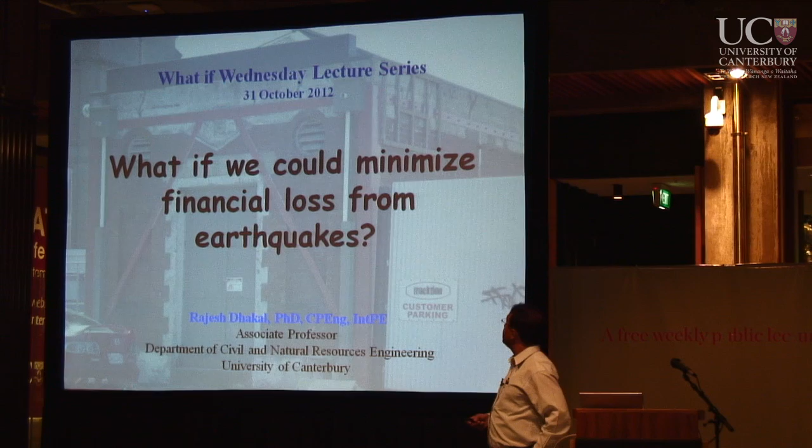So the topic of my talk is: what if we could minimize financial loss from earthquakes? Before I go any further, since I'm going to refer back to the seismic design principles, or earthquake-resistant design principles, it's better to have a quick look at what seismic design actually does. All these seismic design philosophies throughout the world, wherever you go, the guidelines are driven by a few principles, and those principles are given here.

The principle is we require immediate occupancy of our structures, which means no disruption of service after small and frequently occurring earthquakes. If we apply it to buildings, the building does not need to be closed for repair, but it does not require the building to be completely undamaged. You can still have damage which will not require the building to be closed and still satisfy the design requirement. Similarly, at the other extreme, what we have is collapse prevention in large and rare earthquakes. The largest possible earthquakes—if that occurs, the collapse of a building or any structure should still be prevented. Those two are the underlying guidelines.

Several codes have an implicit requirement in between—some codes use that, some don't—and that is reusability, or repairable damage in moderate to strong earthquakes. That means you might need to close the building for repair for a few days to a few weeks, but the building should be reusable, repairable. In New Zealand, we have what we call a design basis earthquake, a level of earthquake intensity at which we design our buildings, and that falls somewhere in that spectrum. We require life safety at that design level of earthquake.

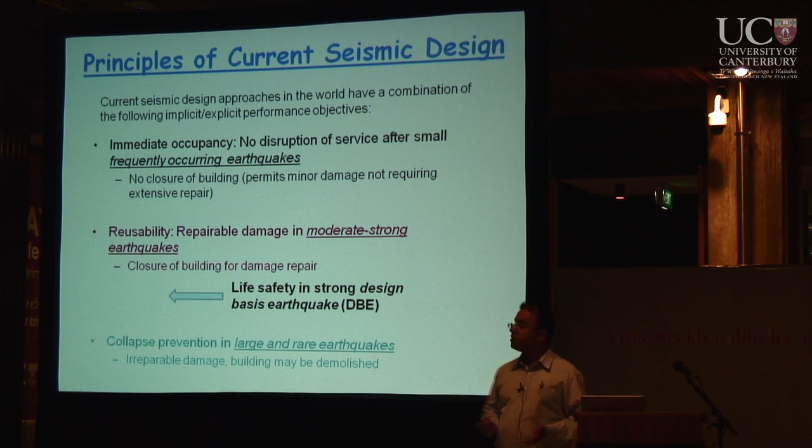So with that background, you should now be able to relate to, or at least understand better, what I'm arguing in the coming slides. With that background, let's have a quick revisit and summarize the main features of building damage caused by the recent Canterbury earthquakes.

Let's zoom into the category of old and unreinforced masonry buildings. We observed that a lot of those buildings were damaged very severely, even some retrofitted ones, incurring severe damage, including heritage buildings. Some buildings completely collapsed, and a sight of buildings severely damaged in a row across a street was not uncommon in the CBD area after those earthquakes.

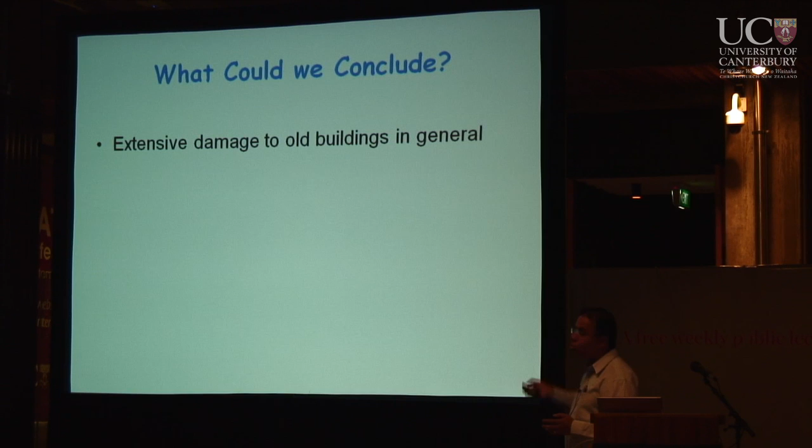I'm not going through the details, but based on what we observed, what could we conclude for this building category? Extensive damage to old buildings in general. Many unretrofitted, unreinforced masonry buildings in the city flattened, they simply collapsed. Most of the remaining old unreinforced masonry buildings were very severely damaged, not technically feasible to repair. That resulted in a situation where probably in the CBD we will not see any old unreinforced masonry buildings left after it's over, if ever.

Let's go to the next category, modern commercial buildings. When I say modern, I mean in the last decade and a half since our modern design code has been established, buildings designed by modern capacity design-based principles. Most of these buildings look fine from outside, not severely damaged, but when you go inside and take out the ceilings or carpets, you see a lot of damage in different components.

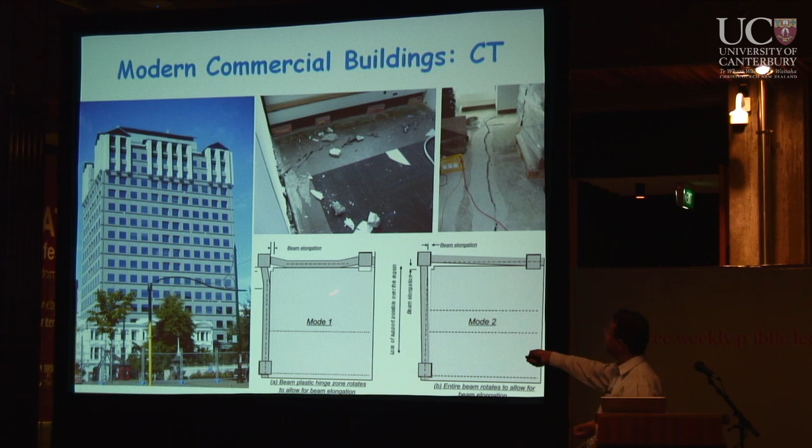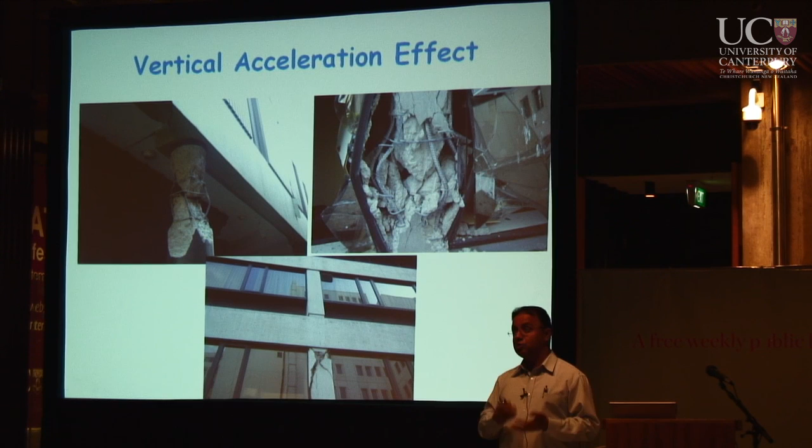Damage in frames, columns and beams, or floors even, and in some other buildings damage in structural walls, columns, floors, or damage in the staircase. Several different types of damage in that class of building, some caused by vertical acceleration effect, because the level of vertical excitation in the earthquake was really high, almost unprecedented compared to any other earthquakes.

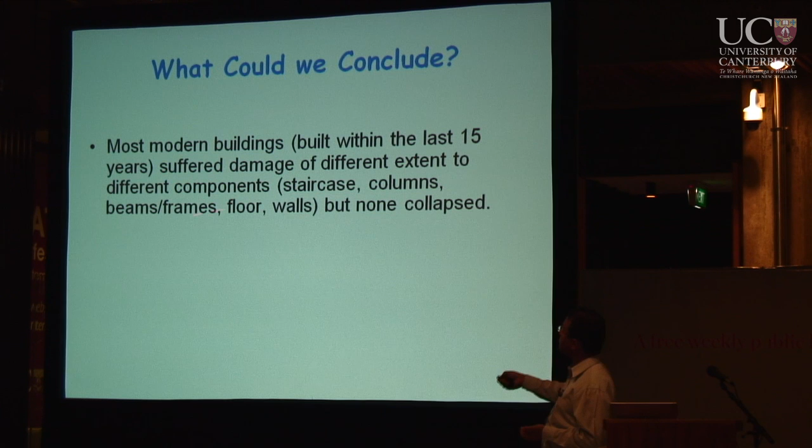So with that in mind, what could we conclude? Most modern buildings built within the last 15 years suffered damage of different extent to different components, staircase, column, beams, frames, floor, walls, but none collapsed. Despite the severer than designed-for ground motions they were subjected to, several modern buildings were technically repairable. I repeat, they were technically repairable.

A lot of those buildings were decided against repair due to other reasons: financial viability, negotiation between insurance companies and owners, and many other reasons. Technically, it was possible to repair many of those buildings.

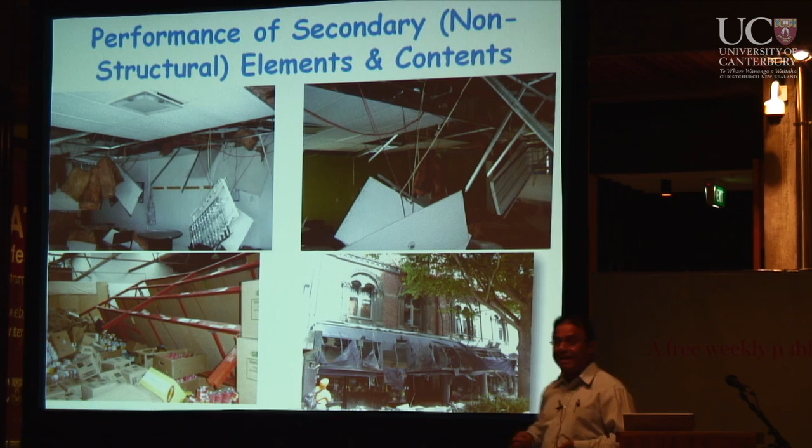Now the third category I want to cover is the performance of secondary building elements. When I say secondary, in a building there are components which carry the load. The load on the floor goes to the beams, the beam transfers it to the columns, and the column transfers it to the foundation. The foundation takes it to the soil. These are structural components, whereas partition walls, ceilings, facades, windows are not transferring the load.

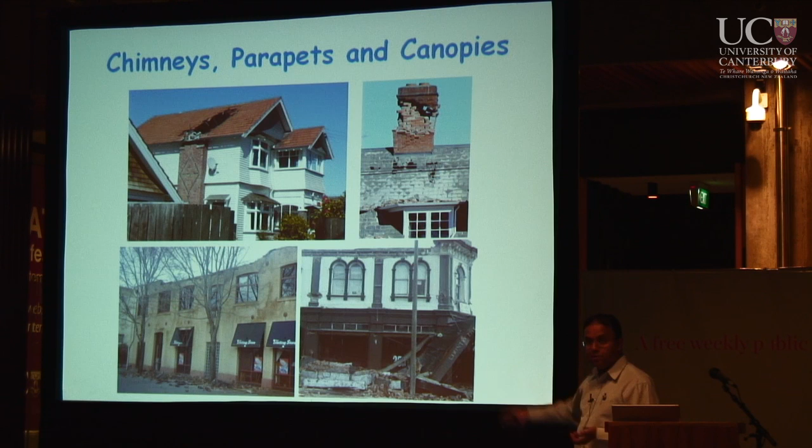They are there for other purposes, so they're called secondary or non-structural elements, and the damage was very severe. You could have seen chimneys falling off the roof of several buildings - non-structural elements. Parapets falling down, non-structural elements. Canopies falling down, non-structural elements. Ceiling damage was a very common sight in most commercial buildings and many residential buildings as well.

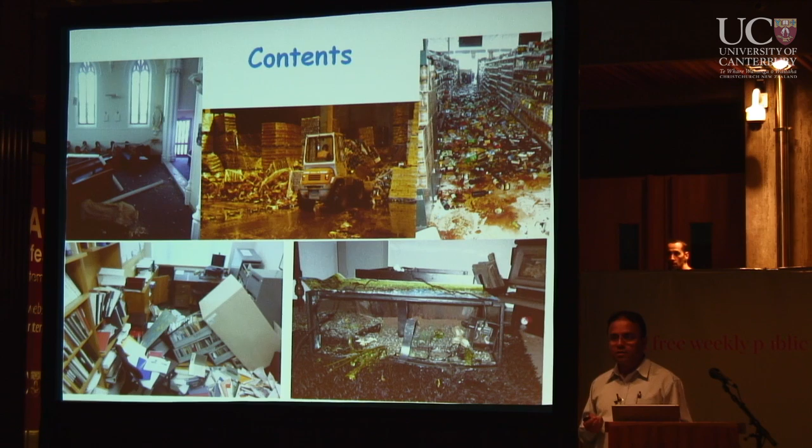Facades, internal walls and linings, so much damage. Windows, so much damage. And contents, racks, shelves, and the things lying on them, severe damage to those parts. These do not make the building irreparable - regardless of how much damage you have in non-structural components, you can still easily repair the building, because they are not required for the structural load transfer path.

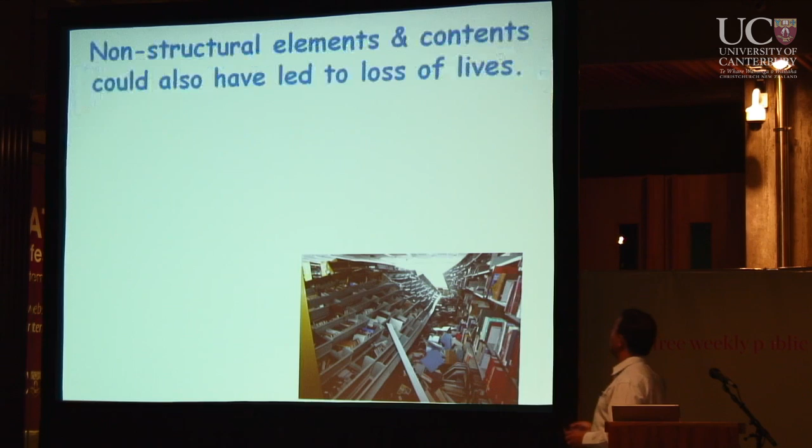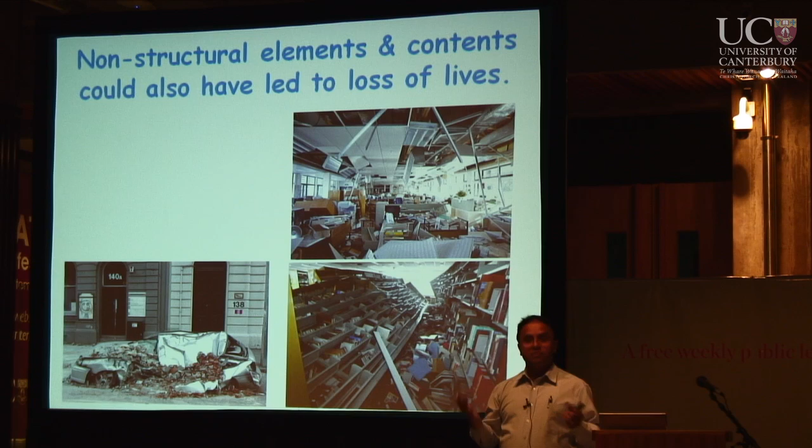Now, with this in mind, if we don't just concentrate on loss but look at life safety as well, damage to these non-structural elements and contents could actually have been a big risk. You can easily imagine people being hit by falling heavy racks full of books that could have easily fallen on someone. We experienced this in our lecture theaters, 7-meter high ceilings, each panel weighing about 15 kg. When a 15 kg ceiling panel falls from 7 meters high, a student sitting in the classroom would suffer severe injury at least, if not a life threat.

So similarly, that whole part is falling down. These things are not only important for loss, but they are also important for life safety. Even if life safety is the criteria, there is no justification to ignore non-structural elements.

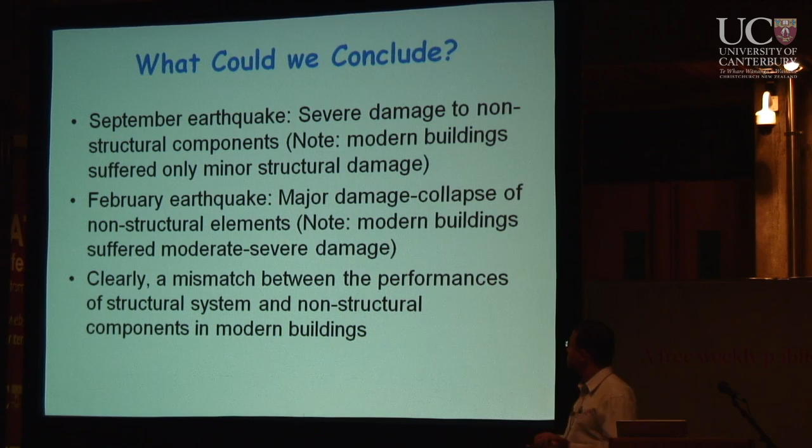So what could we conclude? In the September earthquake, there was severe damage to non-structural components. Note, modern buildings suffered only minor structural damage, whereas the non-structural components suffered severe damage. In the February earthquake, there was major damage to collapse of non-structural elements, when the modern buildings suffered only moderate to severe damage. So what that means is there is clearly a mismatch between the performance of structural systems and non-structural components in modern buildings. So non-structural and content damage contributed significantly to the financial loss.

You could relate this to your own house, probably my house. I have no structural damage in my house. I have been living there for the last 2 years without any repair, but the EQC says that the repair bill is going to exceed $25,000. That is all because of those few cracks on the walls and ceilings, which are not structural components. They contribute quite substantially to the financial loss.

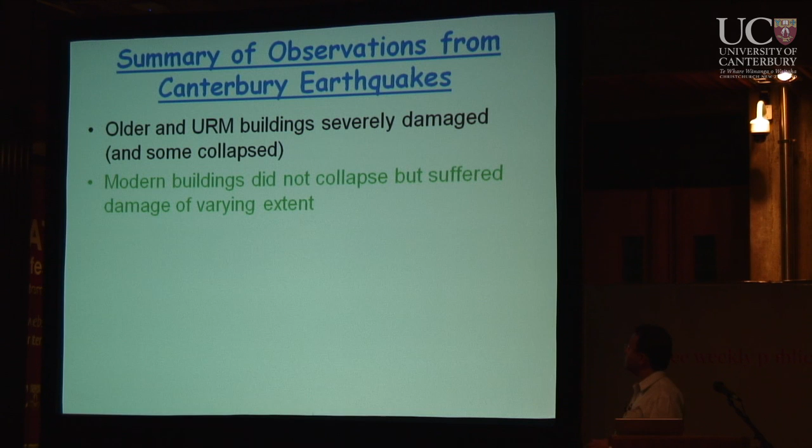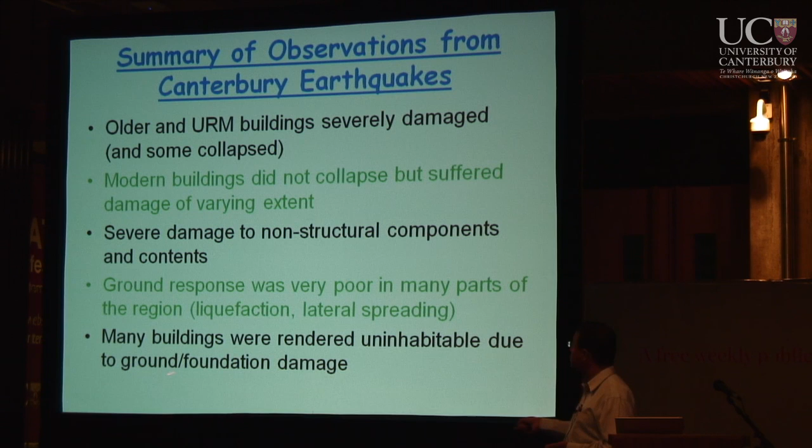Now, summary of observations from the Canterbury earthquakes. Older and unreinforced masonry buildings were severely damaged and some collapsed. Modern buildings did not collapse but suffered damage of varying extent. There was severe damage to non-structural components and contents. Ground response was very poor in many parts of the region due to liquefaction and lateral spreading. Many buildings were rendered uninhabitable due to ground foundation damage, and there was a huge financial burden to the economy. So those are the major summary of what we observed.

Now, let's ask the question: did we expect this? Before we answer that, we have to keep this in mind. The ground motions were similar in the September earthquake and severer in the 2011 February earthquake, compared to the current design level ground motion intensity. Once we keep that in mind, then let's start answering those questions.

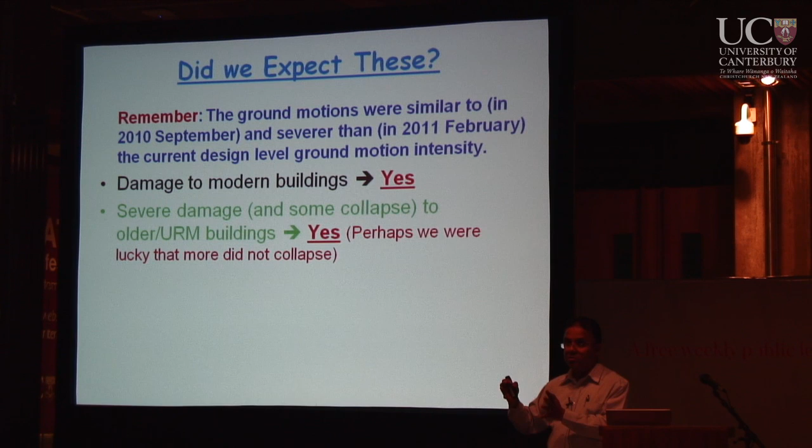Damage to modern buildings, did we expect this? Yes, because those buildings were never designed to sustain that level of shaking. Now, severe damage and some collapse to older unreinforced masonry buildings, did we expect that? Yes. Perhaps we were very lucky that more did not collapse, and that was mainly due to the short duration, because we witnessed a lot of old buildings in a state that they couldn't have probably sustained another 5 seconds of severe shaking.

Damage to non-structural components and contents, did we expect that? We never thought about this. The earthquake engineering community has been completely unaware of this fact. They have never brought this into the design framework. Very poor ground response - I'm a structural engineer, not a geotechnical engineer, so I don't know where the solution is.

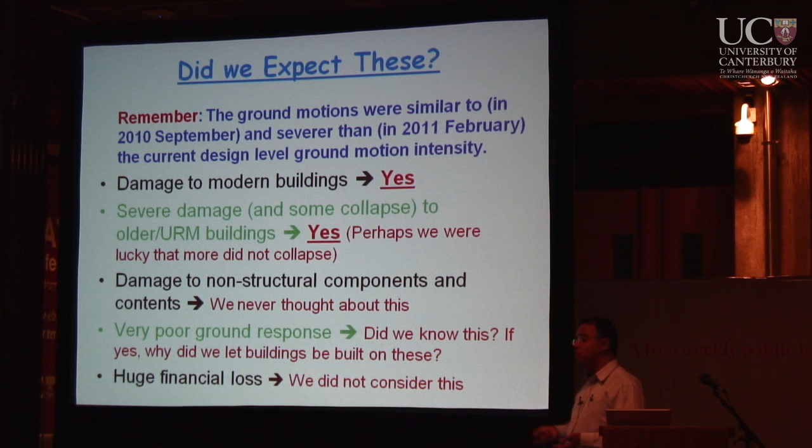So I pose the question, did we know this? If we knew, then why did we let the buildings be built on those areas? Now, the last point, huge financial loss - we never considered loss in our decision-making process. So why is loss not considered? Why is damage the main focus of different people? So loss versus damage, that is an enigma.

If you look at that, given the ground motions were very much severer than those used in design, the extent of damage was smaller than what the engineers expected. And now look at another statement: given the buildings were designed for earthquake resistance by competent engineers, the extent of loss was greater than what the public expected. And they are both right in their place.

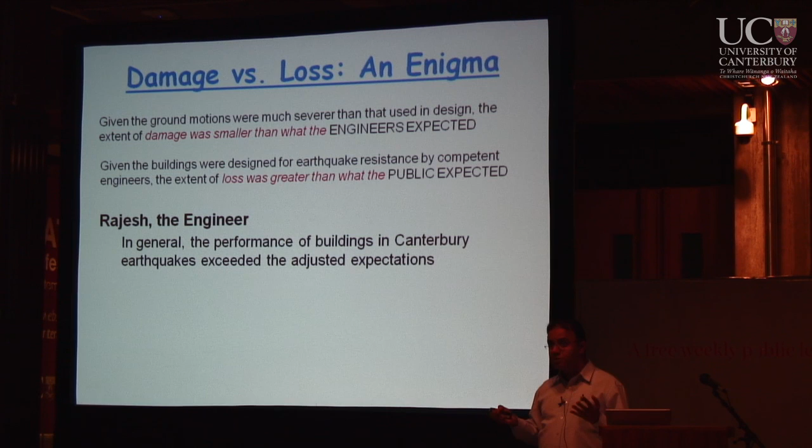So that has forced me to wear two hats. If I wear the hat of the engineer, what I would say is, in general, the performance of buildings in the Canterbury earthquakes exceeded the adjusted expectations. Yes, that's right, that's a correct statement. And then, when I throw that hat off and put on the hat of a citizen, then I ask that question: really?

The earthquakes have cost us $30 billion. That is 15% of our GDP. Did we expect to lose more than this? Do we really need to go broke before we realize, before we admit that we haven't done well? And I'm right there as a citizen.

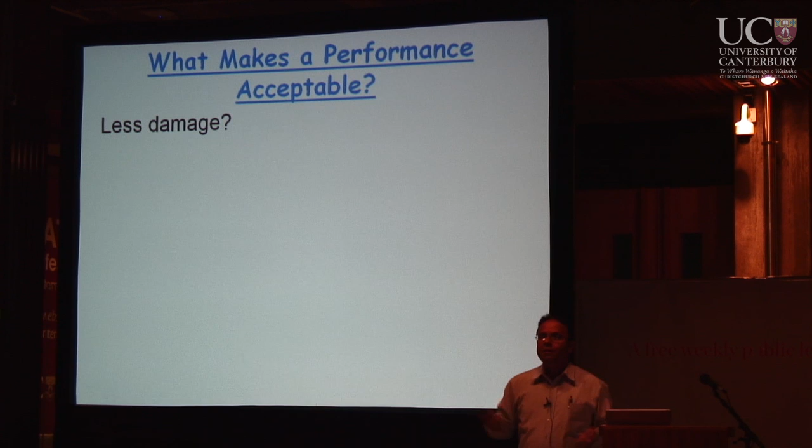So now, what makes a performance acceptable then? Engineers have been thinking life safety, that is it. The public probably are more leaning towards minimization of loss. So if less damage is what makes the performance acceptable, then if you look at those modern design principles, they expect, I would dare to say even attract, damage. And the ground shakings generated by these earthquakes were not smaller than what we design our buildings for.

So even in that design level earthquake, the modern design attracts, accepts damage. These shakings were bigger than that. So obviously, there is no place for us to complain as engineers.

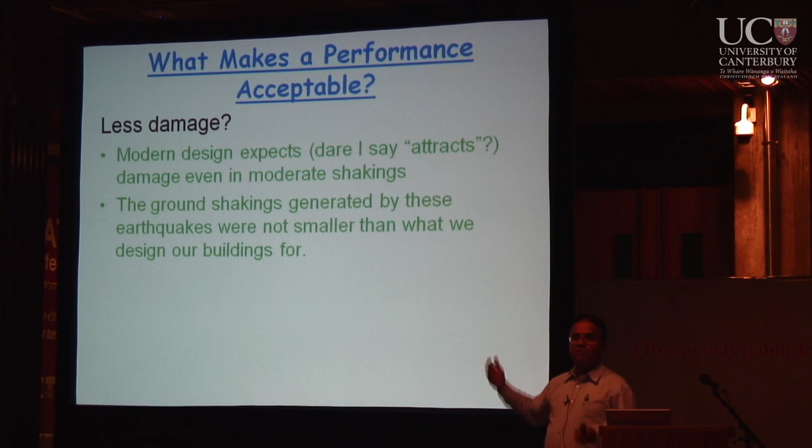Do we think that less financial loss is what makes the performance acceptable? In that case, current design cares about life safety but not any other forms of loss. So if loss hurts or matters, then the design process should explicitly aim to control this, which is not happening.

So now, what are the things we need to do differently from here on? We definitely need to have local soil characteristics checked thoroughly before building consent is granted on a new site. Non-structural components need to be systematically designed for seismic resistance so that we can minimize loss. Stricter regulations on retrofit of older buildings, otherwise they will serve as graveyards again in another earthquake, which only has the question of when, not if.

So communicate better, interact more among ourselves, among the engineers, architects, structural engineers, and geotechnical engineers, so that we know each other's limitations and expectations. And more important, with the public, because the public had the impression that when we say design for earthquake resistance, they thought that meant earthquake proof, which is not the case. So as engineers, we have not communicated well with the public.

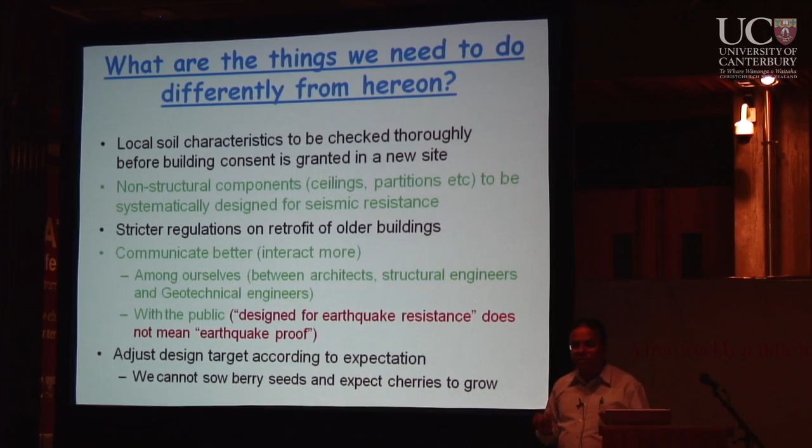Now, adjust the design target according to expectation. If we expect loss to be minimum, then we need to have that in the target itself. We cannot sow something and then expect something else to grow out of it. So those need to be compatible, right?

So now, what are the research needs that enable us to do things differently? For existing buildings, what we need is reliable retrofit guidelines and enforcement policies. For new buildings, what we need is low damage building technologies for all types of buildings. Damage resistant design for non-structural components - ceilings, facades, partitions, parapets, all those things. Reliable ground assessment and mitigation methods, and then development of loss-based seismic design guidelines.

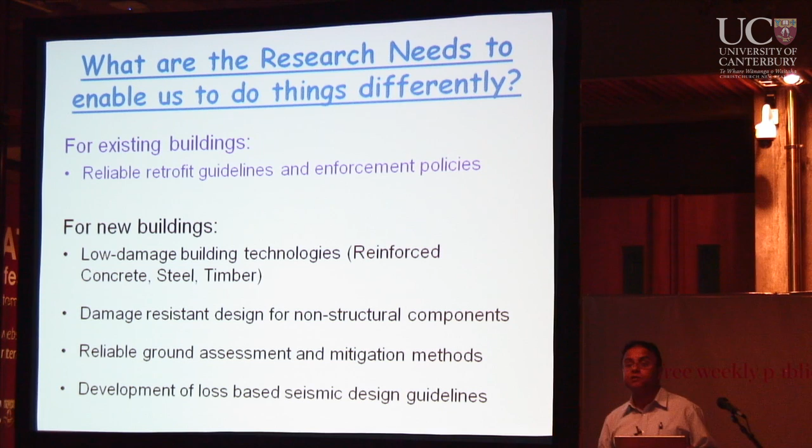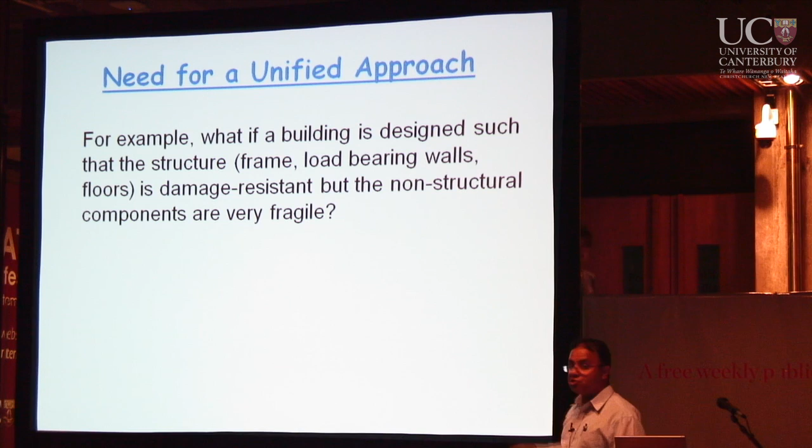So those are the things that we need, but I have another question. Can we apply them separately? My answer is no. Why? Let's look at some examples. What if a building is designed such that the structure - the frame, load-bearing walls, and floors - is damage resistant, but the non-structural components are very fragile?

Let's look at some of the studies that we have done. When we look at the loss coming out of a building, depending on different types of uses - office building, hospital building, hotel building - if you look at the contribution of different types of loss, the structural loss is only 18%. 62% is non-structural loss, and 20% is the contents loss. That 18% value goes down in other types of buildings, like hospitals, because the contents are so valuable - those machines or equipment are really, really valuable. So the content contribution goes up.

Even our own study at the University of Canterbury - my colleague Brendan Bradley, who was a PhD student of mine, did a detailed study - and we found that even for the New Zealand scenario, looking at the uses of buildings in New Zealand, only about 25%, 14 plus 11, of the total loss comes from structure. So if we use that low damage structural technology, what happens? All our efforts may save only a small portion of the total loss, because we are not attacking the majority of it. The majority is 75%, which comes not from structure.

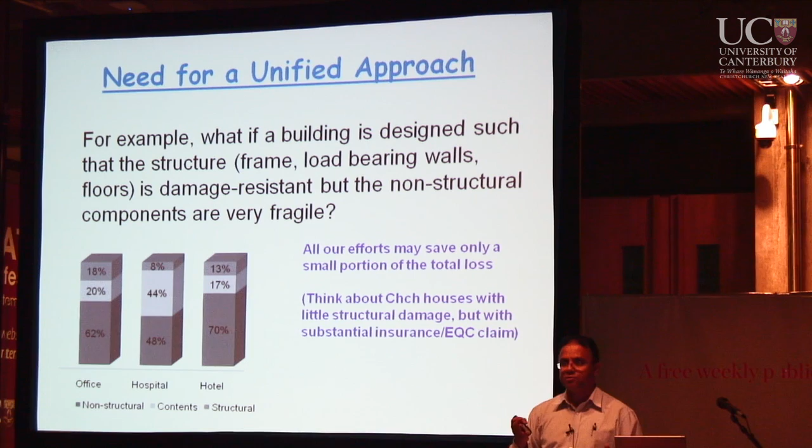So think about Christchurch houses with little structural damage but with substantial insurance and EQC claims. That's the example of my house which I gave you - no structural damage, but the loss is still substantial, and even if I had better structural technology applied in my house, it wouldn't have made much difference in terms of loss. Hence, for loss minimization, non-structural components and contents should also be designed for damage resistance.

So soil is an integral part of that load path. Now, with that in mind, let's apply our chain theory, which is a very common and fundamental principle in structural design. Basically, if the whole building-foundation-soil system is idealized as a chain, and earthquake is the force, then that force has to be taken by and safely transferred to the next component in that load flow path. Each of these links of the chain are those critical elements of the load path.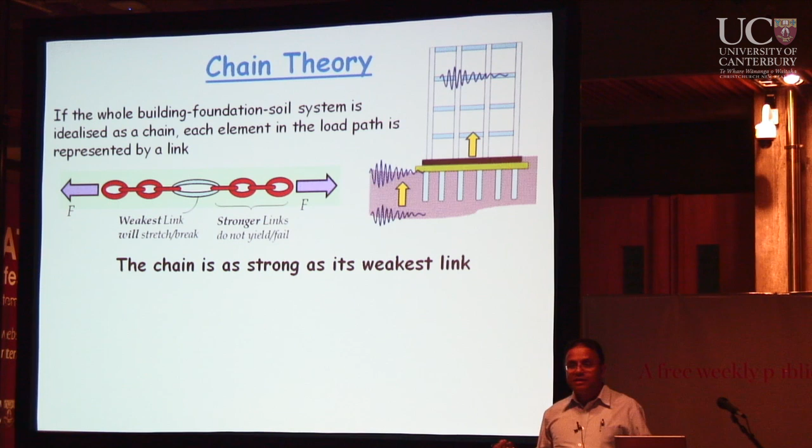So soil obviously is a critical element there, right? Now, the chain is as strong as its weakest link. Absolute strength is not important. Strength hierarchy is - which is weaker than what - that matters more than how strong each link is. And it is a waste of resources to try to further strengthen the stronger links. Regardless of how strong you make that chain or link, the chain failure capacity will still be dictated by the weakest one.

So it's a complete waste of resources. Now let's apply that principle and see: if the soil is the weakest component, then there is no benefit of designing a building that can sustain bigger shaking than the soil. The soil will fail anyway. That is the chain theory.

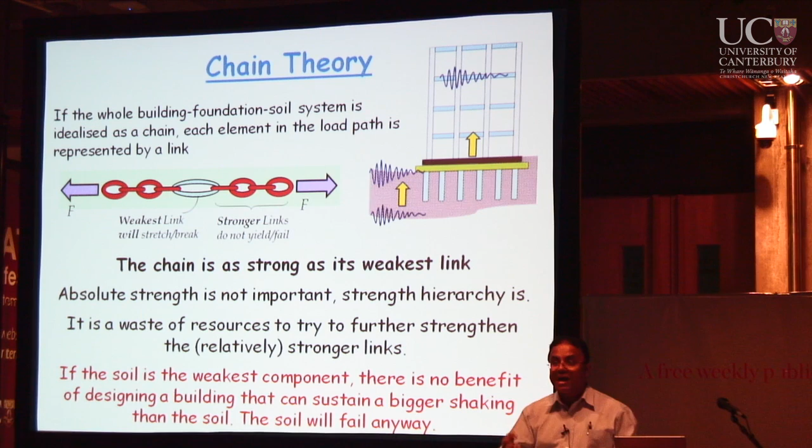So now, if we just concentrate on the building without giving any due consideration to the soil, and design the building for required capacity, that doesn't mean the building is safe, because it is a system. The load doesn't come directly at the foundation of the building. It comes at the bedrock and then gets transferred to the foundation through the soil, which also has to be able to take that. So now, this cries for a system design approach.

So what would be a typical system design approach? For the design level earthquake, the ground shaking for which we design, check the soil capacity. Our geotechnical engineering colleagues would have already calibrated at what level of shaking what type of soil - clay soil, sandy soil - would liquefy or would start spreading. So there should be a relationship like that, and that will give us the approach, the method or the tool to check it.

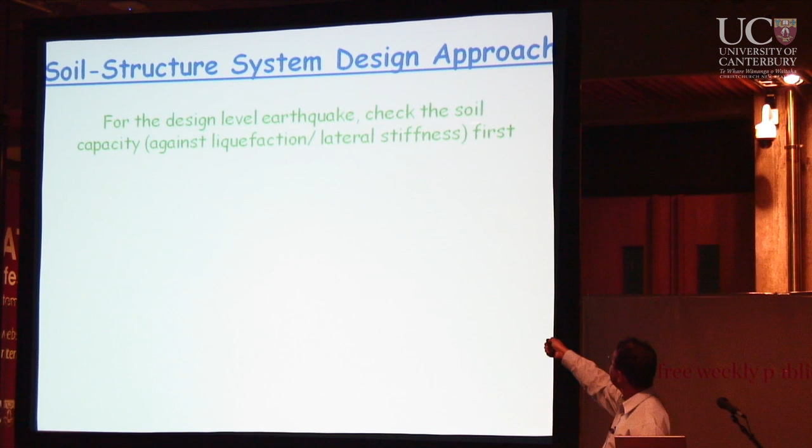For the design level earthquake, check the soil capacity. First, if the soil is strong enough, then allow a building to be built there. If not, first apply measures to enhance the strength or stiffness of the soil to the required level. Otherwise it's useless designing the building for the required design level earthquake. Otherwise, premature soil failure will make the building uninhabitable after an earthquake, regardless of how strong the building is. That's the framework of the unified design approach.

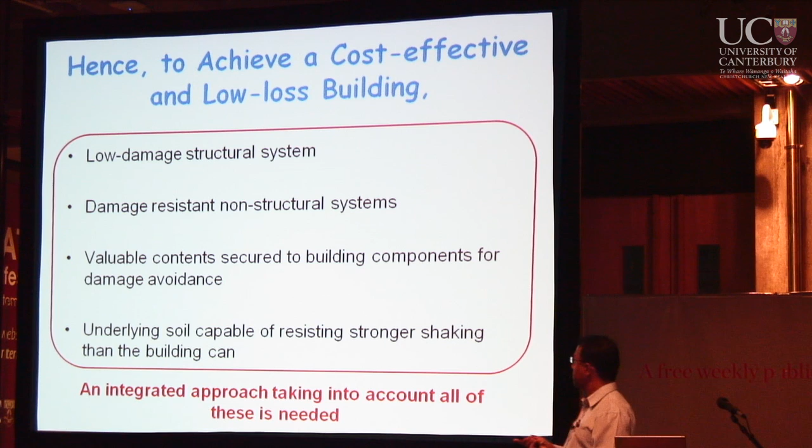Hence, to achieve a cost-effective and low-loss building system, what do we need? We do not need those things applied separately, but applied all together. Otherwise, we don't get the cost-effective system. So now, how has the ongoing ductility-based capacity design performed?

Immediate occupancy in minor earthquakes, that was requirement number one in the very first slide. We achieved that very frequently. But minor damage needing repairs without disruption - that will still satisfy the criteria, but we cannot rule that out. Reusability in moderate to strong earthquakes is also achieved, but moderate to severe damage resulting in injury and disruption of service, which is called downtime, and life safety in very strong earthquakes.

And I can confidently say that the modern design we are applying now, if applied appropriately, I'm 99% confident life safety will be achieved. That's what you'll see in the last many earthquakes throughout the world - modern design buildings have resulted in a very little number of casualties. All the casualties either originate from unengineered buildings in developing countries, third world countries, or old unreinforced masonry buildings in developed countries.

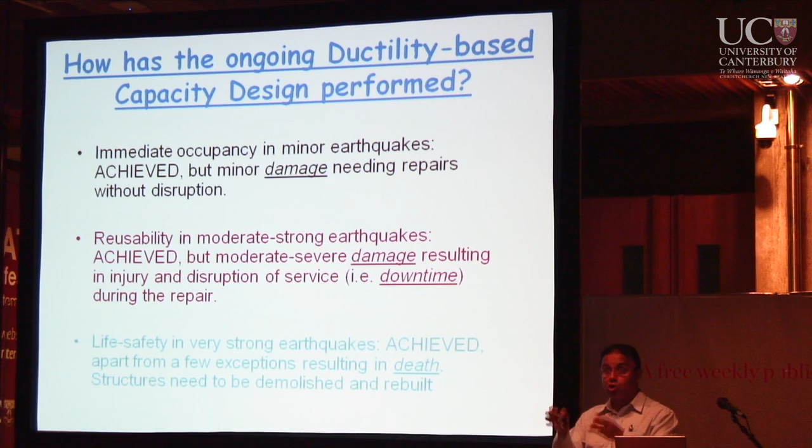So with that, what we see is damage, downtime, death or injury - that is what we call the 3Ds: damage, downtime, and death, and they are the source of loss in an earthquake. So where do we stand? We achieved all the design objectives we wanted from our design method, yet financial loss due to the 3Ds - damage, downtime, and death - could not be avoided.

Even as the designer, even as the engineer, I would have to, if I'm honest, say no, this was not expected from the design code or design philosophy, but this is probably not what we wanted. Where have we missed the boat? We have missed the boat in setting the performance objectives for our structures. So now, where to in future? Do we carry on doing the same thing, or do we do things differently from here on?

So in the future, loss-based design has to be there. We have to apply loss-based design which tries to minimize the loss. So let's say loss optimization seismic design.

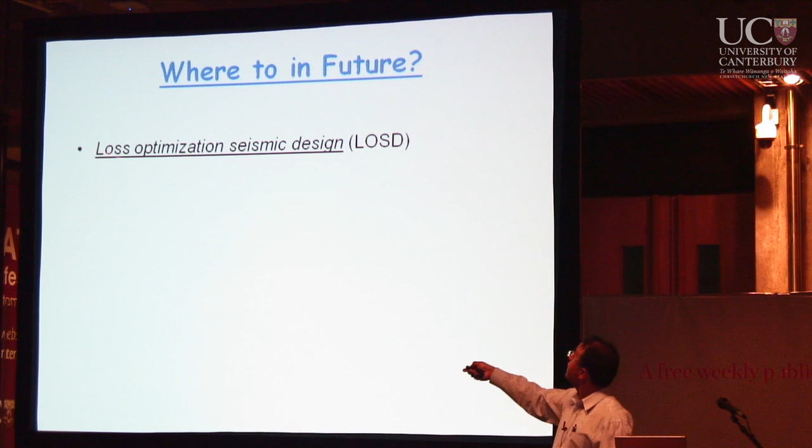Performance objective number 1 is life safety. Of course, we cannot compromise that. Regardless of how much it costs, the life of people is dearer than any loss, so we don't want to mess up with that, we retain that. But after that is achieved, nothing else should matter, whether it's immediately occupiable or repairable or not, that shouldn't be the criteria.

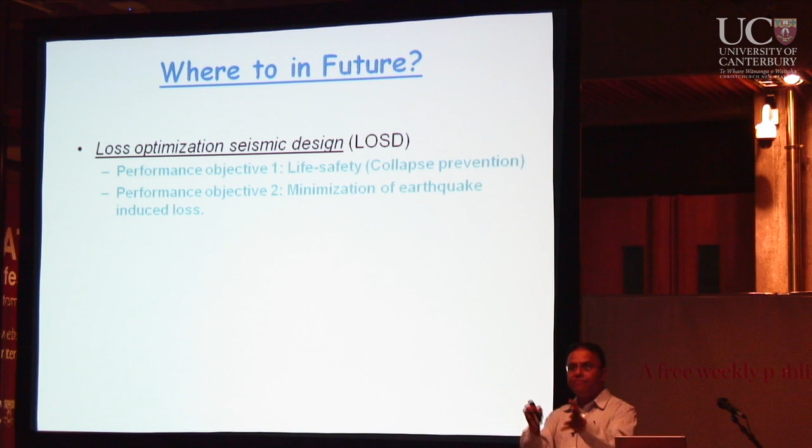Number 2 criteria should be minimization of loss. However you can achieve it, achieve it, because that's what matters. For us, people shouldn't be killed and then loss should be minimum. So now, what is the design criteria for that design philosophy?

The expected loss in an earthquake should be less than the acceptable loss by the client, by the owner, by the society, by the community, by the country. Whatever is acceptable to us, the loss should be less than that.

So now what we need is a probabilistic loss estimation methodology for that. And we do already have that. We are just in the process of simplifying it so that designers could use it in the near future. But currently the method just does that.

In very simple layman's terms, risk is a product of probability and consequence. Probability of an earthquake happening, and then what is the consequence, what is the likely loss from that earthquake. When you multiply that, that is the financial risk.

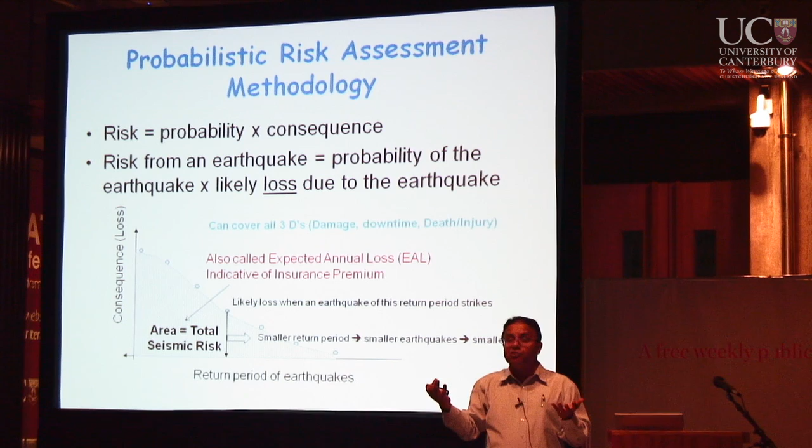And this process can cover all 3Ds: damage, downtime, death. We can directly do that for downtime as well. Only thing is, rather than dollar value, it will be number of days of closure, and how many days of closure it is likely to be closed. And then the client can convert that - okay, each day I was earning like $20,000, so for 1 week it is 140,000. So you can convert that ultimately.

Now, if you look at that curve and try to dig deeper to find out what's contributing to that risk - this is a typical curve, and for example, the expected annual loss is 0.35%. What that means is for a $1 million value, it is on average $3,500 per year. Sometimes you might not get any loss for 10 years, and in the 11th year you might get 35,000, but it is averaged throughout per year.

And then when you look at different bands, this is a little bit mathematical now - this is logarithmic scale, that's why this distance is 10 times bigger than that distance, but in logarithmic scale you don't see that. That's why this black area comes out to be like that, and this yellow area comes out to be like that. That black area is bigger because it's logarithmic scale - that base is 10 times larger than the previous one. So what it's telling us is out of that EAL of 0.35%, 0.18 is almost half of that.

More than half of the total risk is coming from small to moderate earthquakes, which have a return period between 10 years and 100 years. Inverse of that is return period, right? So now, that is frequently recurring events with small cost per event, in comparison to other earthquakes.

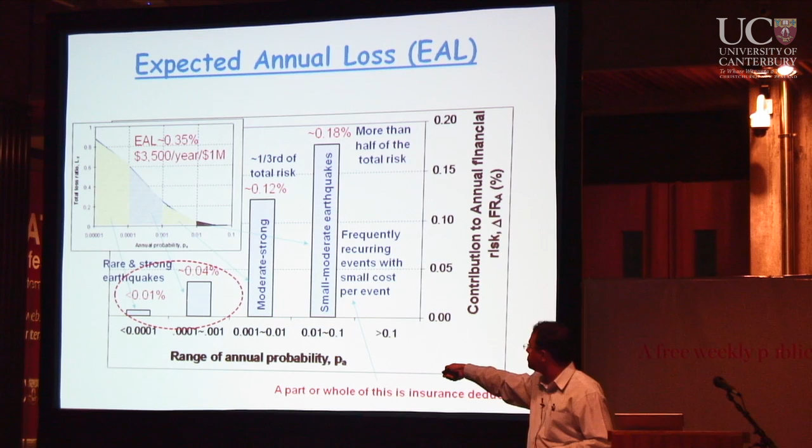Now, if you look at the larger earthquake, that is actually from 100 years to 1,000 years return period, the contribution is 12 out of 35, which is about 1/3 of the risk. If you look at those big events, of course, they have huge consequence, but the probability is so small. When you multiply probability with consequence, that gives you the risk. So that risk comes out to be small because probability is so small on an average basis. So that is a very small contribution to the total risk.

Now, what does that lead us to? It leads us to another term called expected lifetime loss. In annual loss per year basis, if that is the loss, then when you keep on accumulating that over years, throughout the lifetime of the structure, you will know over the lifetime of a structure how much money you are likely to lose. And if you don't take into account any interest rate, just keep on accumulating the expected annual loss, of course it will be a straight line. If in 3 years' time it is 3 times the expected annual loss.

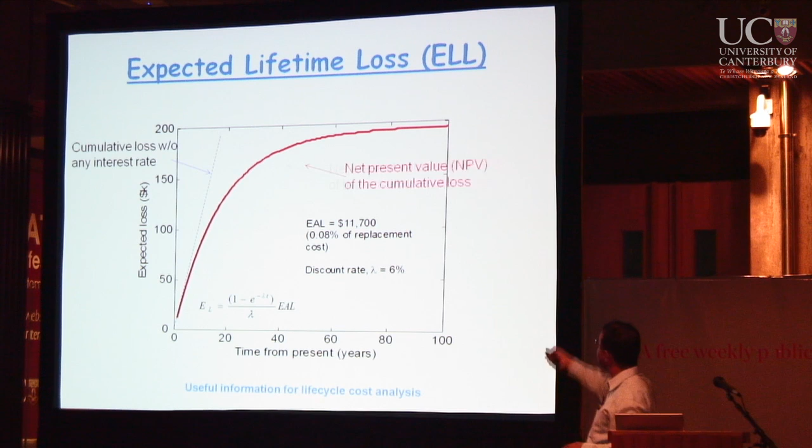But we have something called the net present value because $1,000 10 years later is not equal to $1,000 now. It is less than that, right? So if you take that into account by using some interest rate, then your curve goes like that. That is your cumulative net present value of your earthquake-related lifetime loss.

So let's look at that now. How does that help us make efficient decisions? A couple of questions I'm asking: is a retrofit economically feasible? Or is the extra cost for low damage design financially justified? Let's try to answer that question by doing the life cycle cost analysis.

Let's say that red curve is the expected annual loss curve, which we saw in the previous slide, without any retrofit. Now, there is a retrofit option for us, given by a designer, which costs, let's say, about $40,000 upfront at the beginning. But once you retrofit it, its annual risk goes down, since it is more robust than the structure was previously. So your expected annual loss will come down, and because of that, the rate of increase of that cumulative loss goes down. That blue curve, which is with retrofit, will cut that red curve somewhere, and that gives us the time until retrofit is feasible. So if you want to use that structure for more than 17 or 18 years, then your investment is justified. Otherwise, it is not.

If that is the case, then what you do is look for a second option. There might be another retrofit option which might cost $80,000, so it will start from there. But your cumulative curve might be flatter, and it might cut off earlier. So it's a very handy economic tool.

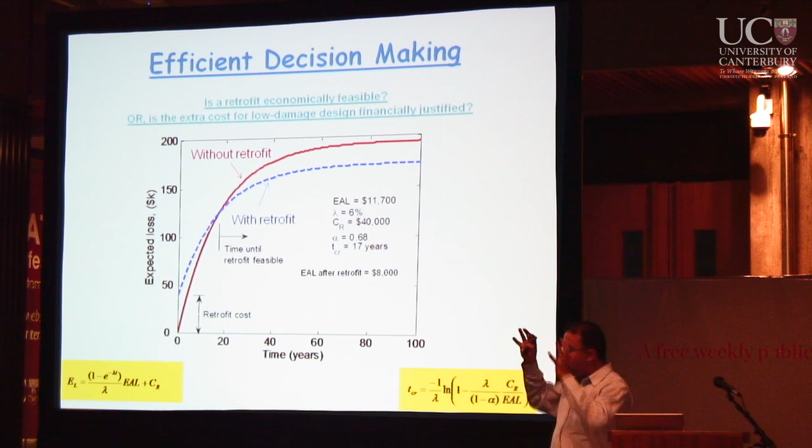Now, let's look at how can we optimize the loss.

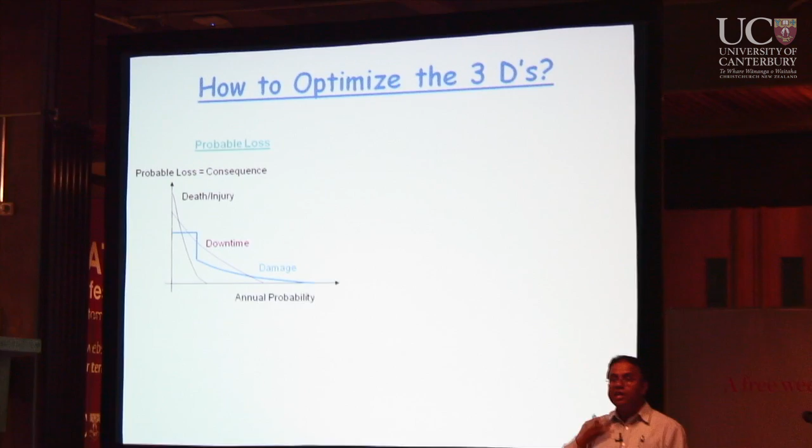This curve shows you annual probability of earthquake and the probable loss consequence in terms of damage, downtime, death, or injury. When the earthquake is small, damage kicks in, some few minor cracks and things thereabout. As the earthquake size grows, downtime, the need for the building to be closed for repair, starts later. And as you go really large, big earthquakes, then injury and death start kicking in. So those are the conceptual nature of the three losses.

You might see that strange shape. What is that? That is actually when the damage happens such that the repair cost is more than 50% or 60%, the owner or insurer will make a call saying, hey, it's not worth putting that money into repairing the building. Rather, I'll demolish it and build a new one. So once that 50-60% decision cutoff value kicks in, suddenly the loss goes to 100% because you decide to demolish the building.

Now let's look at three bands: smaller earthquake, moderate earthquake, and large earthquake, and see what contributes the most. In that high probability band of smaller earthquakes, you'll see there is no contribution of death or injury, and very small contribution of downtime. Most of the loss, whatever it is, might be a smaller value, but it is dominated by damage, the repair of the damage.

In the medium band, downtime kicks off and starts to dominate. Injury just starts because of only small probability. And in the low probability band, meaning big earthquakes, your loss, downtime, and damage hit 100%, because the building is not repairable and the downtime is infinite. The maximum possible time is the downtime, because you have to demolish it, build a new one, and only then start getting service. Damage also hits 100% of the building value since you demolish it, whereas there's also substantial contribution from death.

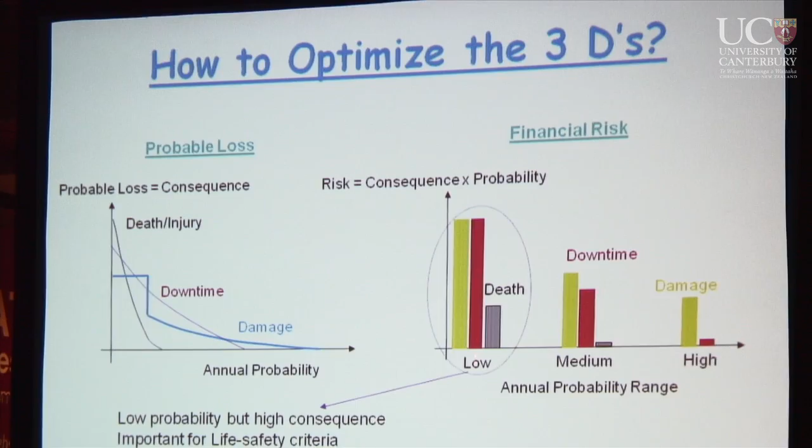Now let's look at it in terms of strategic point. That part is low annual probability, meaning large earthquakes, so low probability but very high consequence. That is where the threat to life safety and injury comes mainly from, not from the other part. So that's why we don't want to mess with that part. Regardless of how much money it costs, we still want to retain that assurance to life safety.

Whereas let's look at this part: small to moderate earthquakes, which happen more often than those big life-threatening earthquakes. That's where a lot of loss is coming from damage and downtime. So even if we mess with that, we are not compromising our life safety. That's where we have to attack as an engineer. We have to develop technologies that take care of, that minimize that as much as possible.

And that's where innovative technologies could come in, which avoid damage, because currently the perception is loss is proportional to damage. If we reduce damage, obviously we reduce loss. But the relationship might not be a straight line, might be a little complicated. Let's not go there. So here the idea is to avoid or reduce damage in minor to moderate earthquakes. Let's not play with that major earthquake; let's retain our life safety feature.

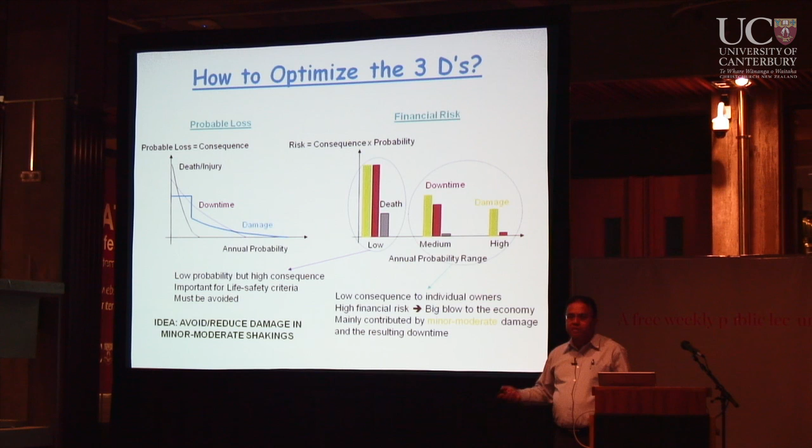So that is the criteria, that is the idea. Now, how do we reduce damage then? How can we reduce damage? Number one is provide very high capacity.

Have you ever wondered when you go to some historical cities and see those huge mosques, forts, palaces, which are still intact despite having seen through several big earthquakes? Where does that come from? That merely comes from the capacity. The capacity is so huge that the earthquake cannot do anything. But that is not the solution for our normal residential buildings, which are in thousands in number; we can't do that. Ideally, if you had infinite capacity, you could avoid damage in any earthquake.

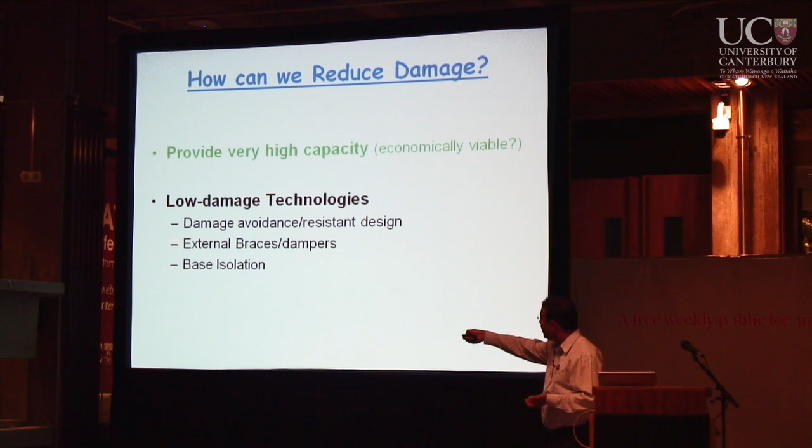Now the next is low damage technologies. That's where research is hitting. A few of them I have identified: damage avoidance design or damage resistant design, external braces and dampers, and base isolation. Let's look at what they do.

First, damage avoidance design. It has got different names - different people call it differently: hybrid system, PRESSS system, rocking system, damage resistant design - whatever they call it, the principle is the same. What are the principles?

The principle is we have precast components which are constructed in a factory. We bring them to the site, assemble them together, and they've got holes inside through which we put our tendons, the post-tensioning tendons, and clamp it together on site. So that's the principle.

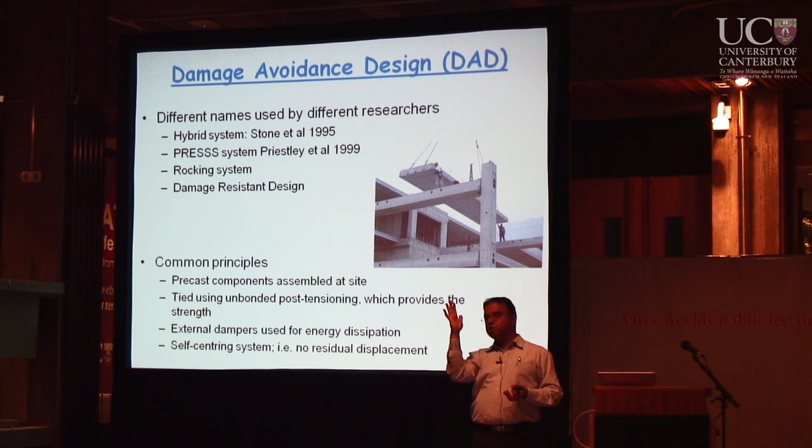It has some really good features, like a self-centering system. After an earthquake, modern ductile buildings have residual damage and residual displacement, you see them in a tilted position. This system would never do that, it would come back to its original position. That's what we call self-centering. So they've got a few interesting features.

So what is the criteria, what do we do there? Structural damage is actually associated with excessive bending. For example, what does an earthquake do? Earthquake doesn't apply any force, it simply moves your ground. If somebody moves my ground from here to Dunedin, I will not be damaged, but if you do it very slowly, even if a building is transferred in a car, it will not be damaged. Why during the earthquake, with just small movement, does it get damaged? Because it happens really fast.

The acceleration is the key. You can imagine yourself sitting in a car, you start it, accelerate the pedal, your bum goes together with the car, your body wants to resist it. That's what happens in a building. Your base is taken away by the earthquake, and the body of the building wants to retain its position because it happens so fast, and in the process it has to bend. When it bends, it gets damaged, the bar buckles, the concrete spalls, all these things happen.

Now if we avoid the need for members to bend, we can avoid damage. That is the principle of damage avoidance design. And how do we do that? We still allow the structure to deform, to bend, to displace, the top displaces in relation to the foundation. But that displacement doesn't come from bending, it comes from something called rocking.

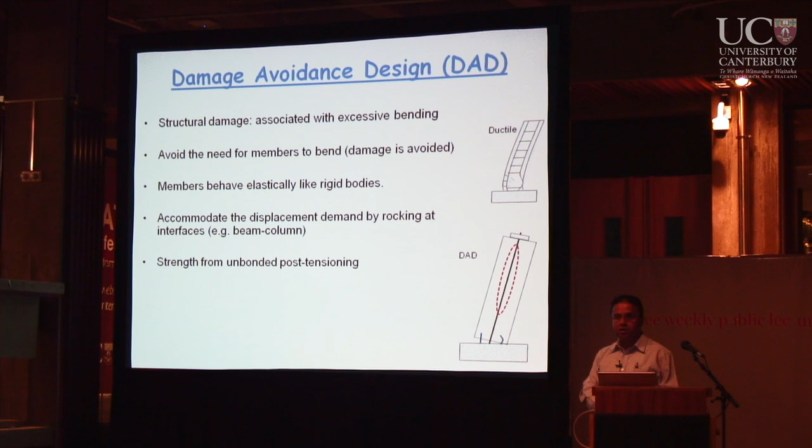Now, that damage doesn't need to be there. What we do is smartly put some small sacrificial pieces. They will get damaged, which can easily be repaired or replaced after the earthquake. Whereas in a normal building or bridge, once that happens, when you send engineers to do an assessment, they would say the inside has been damaged, the building is still standing, but the reinforcing bars have already yielded. And once they've yielded, regardless of how much you try, you cannot bring that back to its original position or state.

So legally, the owner is in a very strong position to say, no, I don't accept this, you have to replace my building. And the insurance company's engineer, however big an expert, cannot rule that out, because they cannot argue against it. It is true, once the reinforcing bar damages or yields inside, it is very difficult, if not close to impossible, to bring that back to its original position. Whereas with this system, we can definitely repair the building.

So now, the external dampers provide the energy dissipation. The strength comes from the unbonded post-tension rod inside. And when the building rocks, or when the column rocks, there will be a huge stress concentration at that point, so that is likely to be damaged. So you have to place special detailing, a special armoring technique, to get rid of that damage at that peak, at that toe.

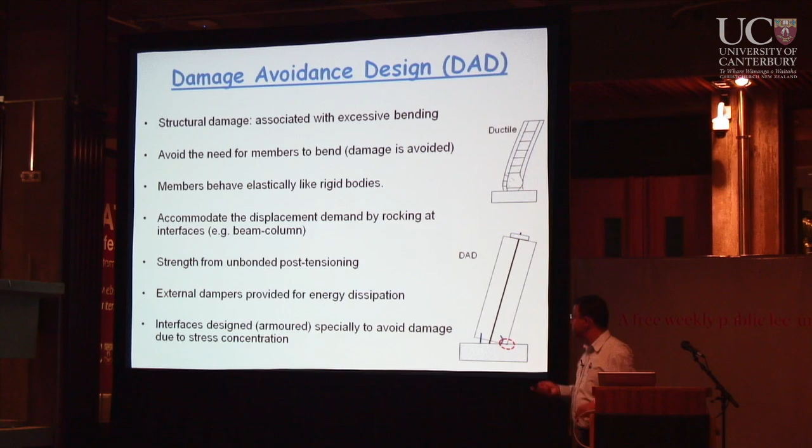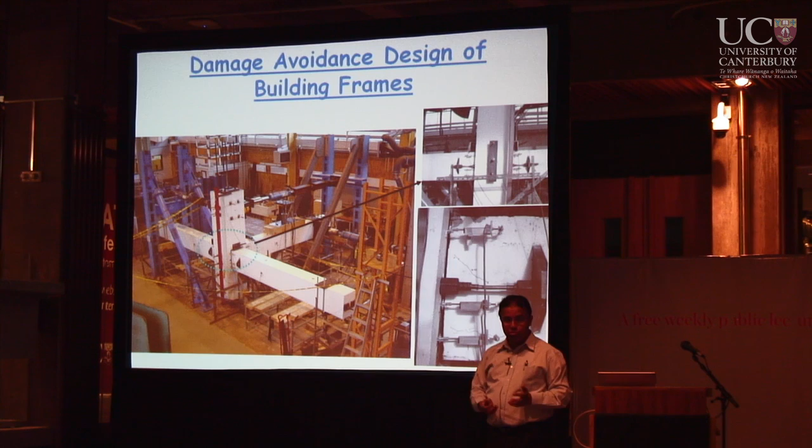And we did that for building frames as well, not only for bridge piers. That's a small part of a multi-story building, from the second or third story, and we tested it to resemble the actions that happen in a building during earthquakes. If you look at it, we have those rocking features at the joint between the column and all three beams. They are just precast separately, brought to the site, and tied together.

And then when you apply that loading, they can simply open and close. Okay, so that's the technology, and we achieved all of this. However, now let's look at its effect on financial loss. What does it do?

It definitely reduces damage, structural damage. But we are talking about loss. So in terms of loss, damage avoidance design has been proved to reduce structural damage, hence less loss from structural damage. That's one component. However, this method aims to reduce structural damage by rocking.

It doesn't aim to reduce the displacement. The displacement is still significant. However, the column doesn't need to get damaged. But imagine in a building, you have got columns, you have got beams, and in between those beams and columns you have got walls, partition walls or other types of walls. If your column deforms like this, your wall has to follow that.

And when it follows that, because the deformation is large, it creates huge force, and the wall gets damaged. Because the damage to the wall is proportional to the deformation of the building. And this technique doesn't try to reduce the deformation. It just tries to reduce the damage of structure despite large deformation. In fact, deformation might even increase because the stiffness in some cases, some combinations, might even further reduce.

Okay, so because of that, you get more damage to the drift-sensitive non-structural components like partitions, facades, windows. And if you look at the acceleration, it will throw your objects, throw your contents away, and cause damage to the content. So the content damage depends on acceleration. Content damage, your ceiling damage, the floor acceleration decides how much damage happens to your ceilings.

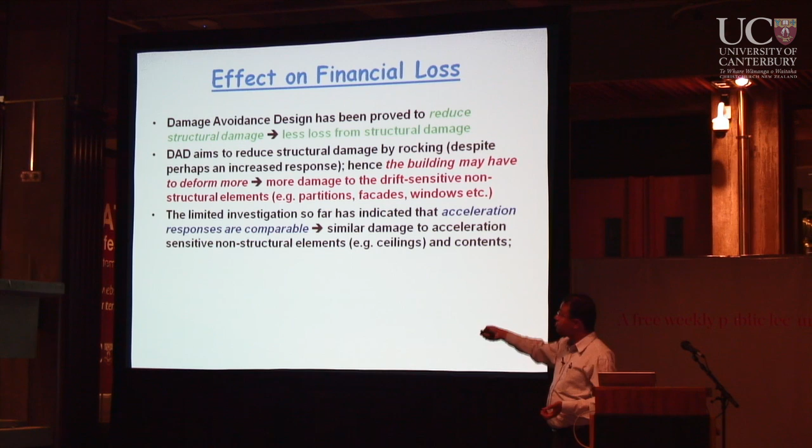Okay, so if you look at that, the limited investigation that we have got so far indicates acceleration responses between the normal and damage avoidance design are comparable. So what that means is similar damage to acceleration-sensitive non-structural elements such as ceilings and contents.

So when you combine all these three, what can you conclude? Therefore, in terms of total loss, damage avoidance design of the structural system only may not offer much unless the cost of the structural system dominates the total building cost.

Imagine a garage where you don't have partition walls, you don't need windows, you don't need anything. You just have the frames and floors and access for the car and parking facility. That is perfect for this damage avoidance design because 90% of the loss of that building comes from the structural system only. Whereas if you apply this to a normal building, an office building, where 80% of the loss is coming from non-structural elements and content, you will save very little, almost nothing. The only change it does is actually make the structural system easily repairable.

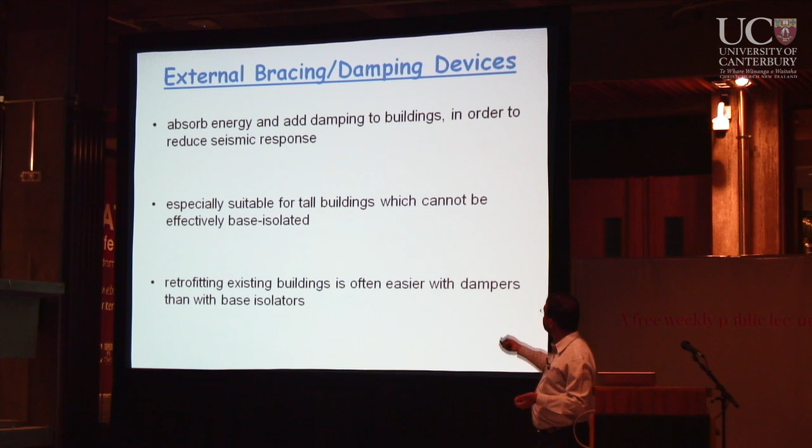It is especially suitable for tall buildings, which cannot be effectively base isolated - we'll come to that. And retrofitting existing buildings is often easier with dampers than with base isolators. Okay, and there are several types: you use viscous dampers, friction dampers, hysteretic dampers. There are several different types. I will not go through the details, but this has been applied in several buildings throughout the world.

Okay, so now, but till now we have not been thinking about non-structural elements or loss. Now, for the first time, we have started pondering about what it does in terms of loss. Let's look at that: effect on financial loss.

External braces make the overall system stiffer. As the system is stiffer, the displacement is small, so the building has to displace less. What that means is less damage to your structural system because the system doesn't need to deflect. Once it has to deflect, then comes the damage, right? Because it has to bend.

And the drift-sensitive non-structural elements like partitions, facades, windows will all be less damaged. So a significant portion of the loss will be reduced. Now, due to increased stiffness, as you make the system stiffer, that means your acceleration increases. That is a simple fundamental dynamic theory. So the floor accelerations are higher, which means more damage to your ceilings and your contents.

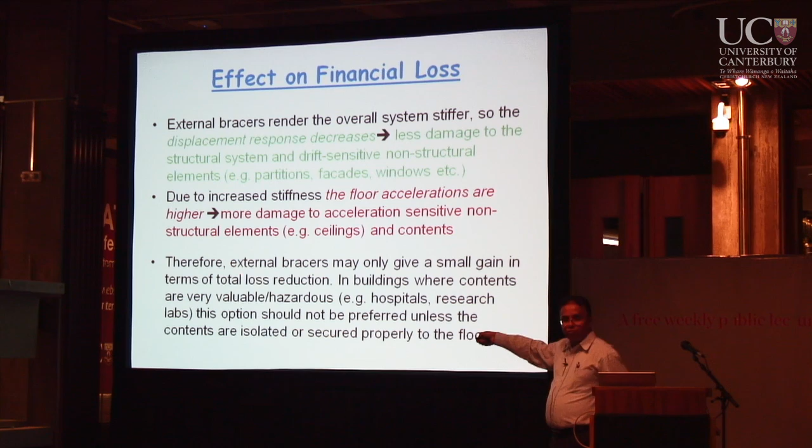So external bracers may only give a small gain in terms of total loss reduction. In buildings where contents are very valuable or hazardous, such as hospitals or research labs, the value of contents is often many times greater than the value of the building itself. So this option should not be preferred unless the contents are either isolated from the floor or secured properly so they cannot be thrown away.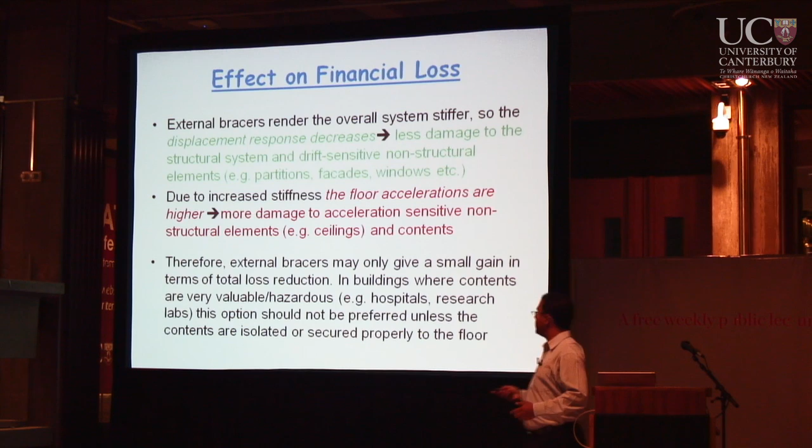Now let's come to the last of the three: base isolation. It's a passive control technique to decouple a building from its foundation. Base isolation does not make a building earthquake-proof, it just enhances the earthquake resistance. Regardless of how much you try, you can never make a building completely earthquake-proof.

If a really big earthquake comes, nothing will stand. So our idea of capacity design is okay because we don't have control over nature. Nature can turn any size despite what we want, so let's not try to control or predict nature. Let's try to control the man-made thing, which is the building. We make it, that is our slave, we tell it how to behave. We don't tell nature how to behave. That's basically what we are doing here.

In base isolation, what we do is simply make sure that despite how big the earthquake is, the building does not collapse, in our normal design philosophy. The building might be damaged, but people are still safe. So base isolation is not suitable for all buildings, it is most effective for short or medium rise buildings on hard soil.

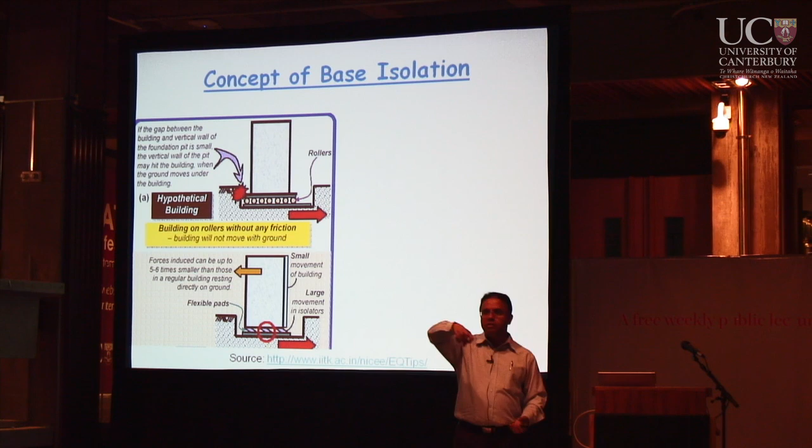Now, the normal concept of base isolation: ideally, if I put my building on ground with some marbles or rollers on it, regardless of how much the ground moves, my structure would simply roll here and there. It will never get damaged, it will simply displace. But I will not have any control over how much it displaces, and that puts me in a very awkward position.

So that's why what we do is we try to go there, but not as much. We put a very flexible isolation layer between the building and the foundation or soil, so that when the soil moves, this layer deforms and transfers only a small deformational need to the building. That's the idea, and it's done through different kinds of isolators.

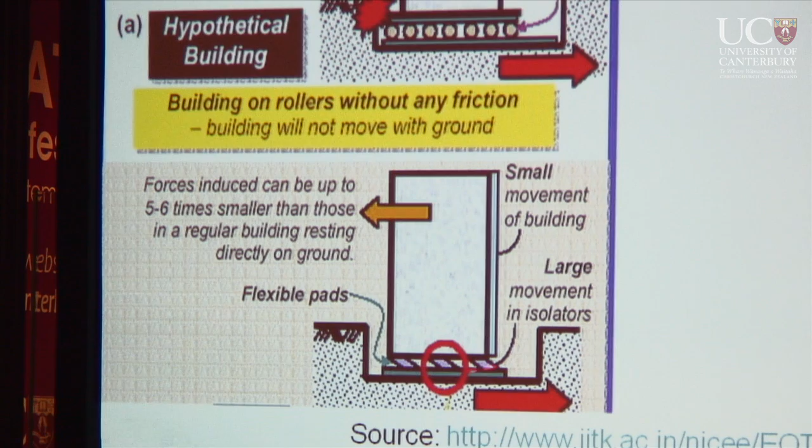There are different kinds of isolators, I will not go through the details, but New Zealand is at the forefront of this technology. One of the early inventors of the base isolation technique, Bill Robinson, just passed away last year. He had his own company, Robinson Seismic, in Wellington, and they produce a lot of different kinds of isolators.

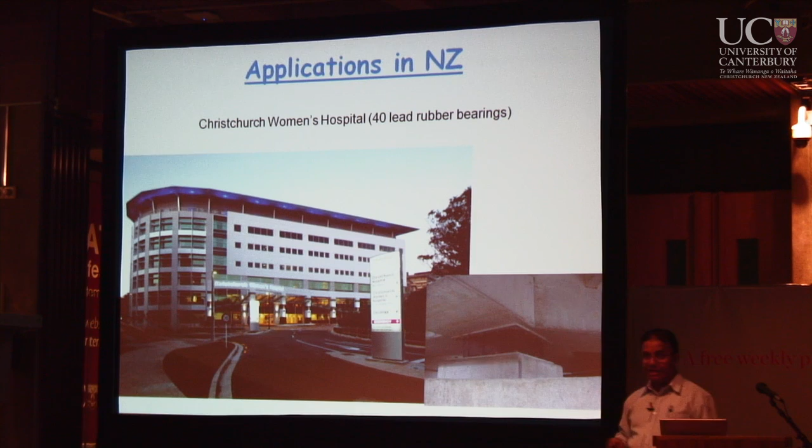So now we have these applications in New Zealand. Those lead rubber isolators have been applied in Te Papa in Wellington, and several buildings in Wellington, and in Christchurch the only one so far, though I heard a second building is being started, the St. Elmo Courts, which is being rebuilt with base isolation technology. But until now, we have only Christchurch Women's Hospital, which did very well in the last earthquake.

So now, effect on financial loss. How does base isolation affect the financial loss that we get? Base isolation makes the overall system softer or more flexible, which means that since the system is softer, the acceleration comes down. So we get less acceleration-sensitive non-structural ceiling damage and content damage because acceleration is substantially reduced.

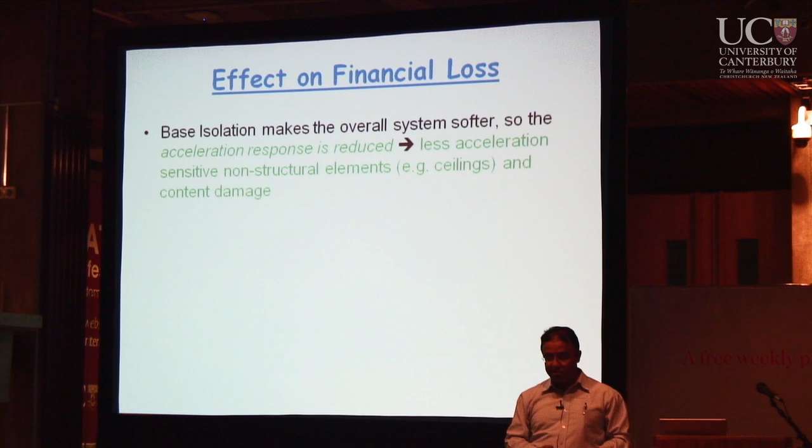Although the total displacement of the system increases because the system is softer, for the same shaking the overall displacement is large, but a major part of that displacement comes from the isolator, requiring the building to deform only a little. So the requirement for the building itself is a lot smaller, causing much less damage to the structural system and drift-sensitive non-structural elements like partitions, facades, and windows.

So overall, base isolation definitely results in a substantial reduction of overall building loss in an earthquake. Definitely a big thumbs up. Now, what is the cost implication?

I searched the internet and found a paper from Saint Martin's University. They did some research and found that base isolation leads to an additional cost of $50 per square foot with their assumptions. Building owners and developers are reluctant to pay this additional cost. However, the benefits of isolation far exceed the initial cost of installing isolation, especially in today's society.

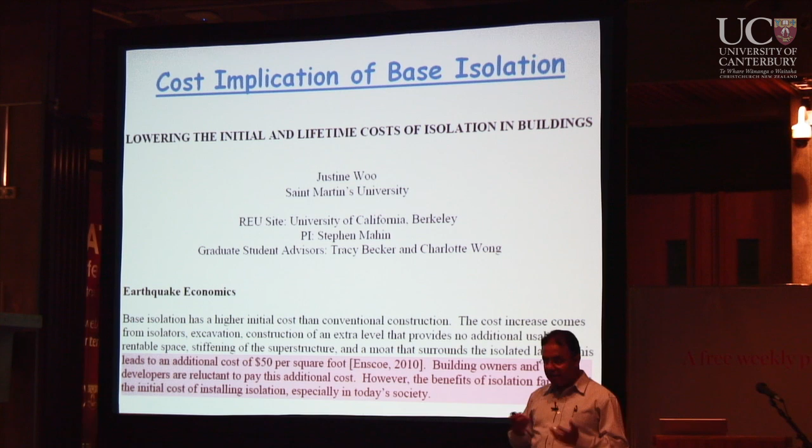That's what they think. Now, despite all this, why is it not happening? Let's hear what I think. What is stopping buildings from being retrofitted or base isolated?

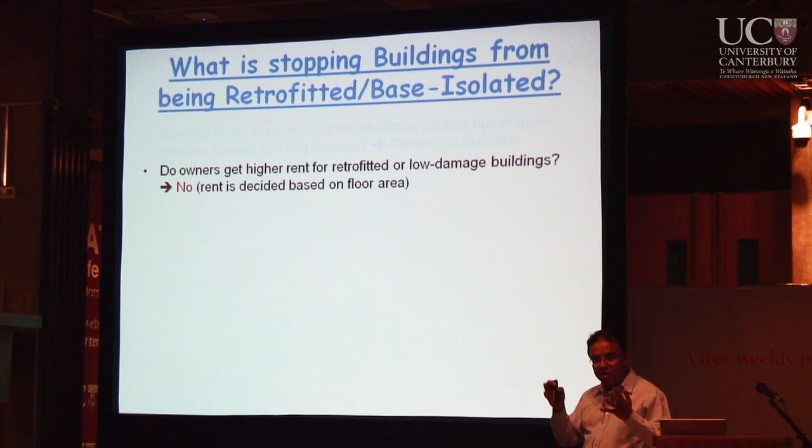Who has to pay the extra cost for retrofitting an existing building, or the extra cost for a new low damage building system? The owners or builders who build it, they have to pay. Do owners get higher rent for retrofitted or low damage buildings? No, the rent is decided flatly based on per floor area. Do builders get a higher price when selling retrofitted or low damage buildings? No, unless I am the buyer - I know the difference and I'd probably be prepared to pay a little more.

Do owners get any discount in insurance premium for retrofitted or low damage buildings? No. Do owners get punished for not retrofitting an earthquake prone building or not using low damage technology? No. Are owners at any greater risk, financially or otherwise, by not retrofitting a risky commercial building? No, because they don't live there - they live somewhere else and rent it out to shop owners or office workers. So they are not at any greater risk. If the building gets damaged, insurance will take care of that. They simply have to pay the same excess, regardless of whether they retrofit or not.

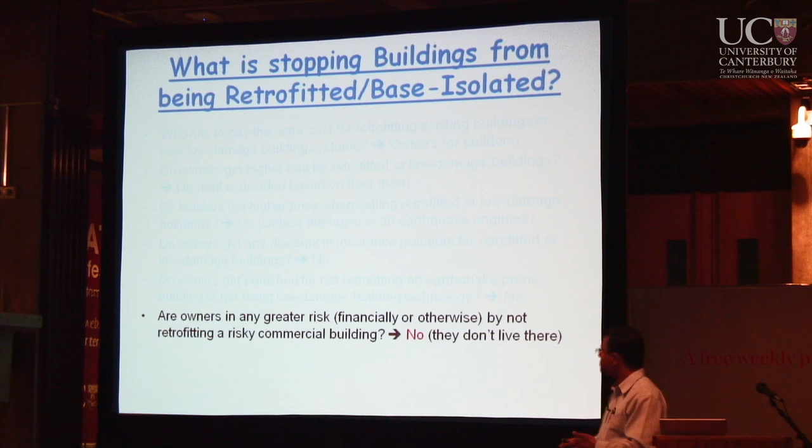So now, who reaps the reward of the investment? Insurers and tenants. Then why should the owners or builders spend any extra money? So the question comes: should not the insurance premium be in line with the risk posed? Yes, that is it, because why you insure is actually to cover for the risk. So if something is well known to put you at less risk, why do you pay the same amount?

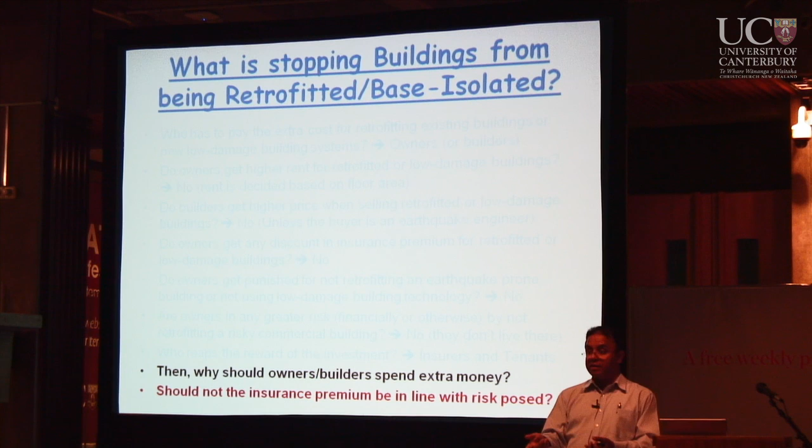So the insurance company, and to some extent the real estate industry, they have to play a great role, because in the current scheme that's not working properly. There is no incentive for owners or builders to spend even one extra penny doing that - unless, like, if I stay in that building my life will be at risk, so probably I'll be forced. But in the commercial sector, I don't stay in that building, I stay somewhere else. I'm trying to build a building for renting.

So in conclusion, there is a mismatch between what buildings are currently designed for, which is life safety, and what the public expects, which is limited financial loss in addition to life safety. Better communication is needed in future between structural and geotechnical engineers and architects, and with the public as well. All parties should be aware of each other's limitations and expectations.

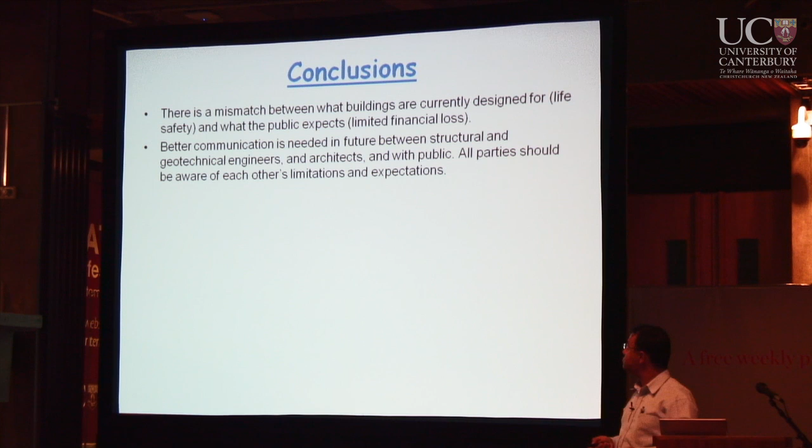A major share of earthquake-induced loss in a building comes from damage to its non-structural components and contents. Hence, resources should be proportionally allocated towards development of damage-resistant technologies for non-structural components. This is a huge problem, and the policymakers are not acknowledging it.

Still, a lot of money is going into thinking, okay, we got damage in the walls and columns, but they were supposed to be damaged because the ground motion was so big - we were aiming for life safety and that's what it achieved. The problem is not with the structural capacity. If you want it to not get damaged at that level of earthquake, we simply have to increase the demand. Currently we are designing for a 0.3 factor - we have to increase that to 0.5, 0.6.

So the proportional distribution of resources in developing different technologies is not there. In future, a loss optimization seismic design is needed, which explicitly aims to also minimize seismic loss in addition to ensuring life safety. To achieve the most optimum performance, the superstructure, foundation, and soil will have to be considered together in a system capacity design approach.

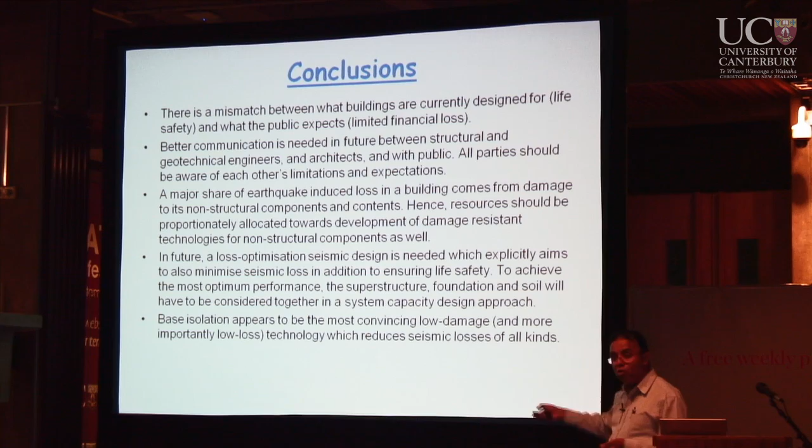Base isolation appears to be the most convincing low damage, and more importantly low loss, technology, which reduces seismic losses of all kinds. Current insurance and real estate models will have to be modified to provide incentives for owners and builders to invest the extra initial cost to retrofit or base isolate their buildings.

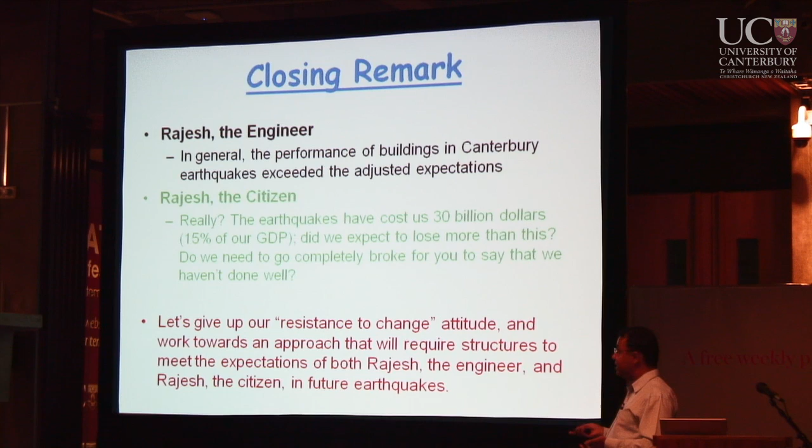So finally, before I close, a closing remark - I told you the story about Rajesh the engineer and Rajesh the citizen, the dilemma which I am facing. Now my appeal is, let's give up our resistance to change attitude and work towards an approach that will require structures to meet the expectations of both Rajesh the engineer and Rajesh the citizen in future earthquakes. With that, I thank you for your patience and thank you very much. I'm happy to answer any questions you have.